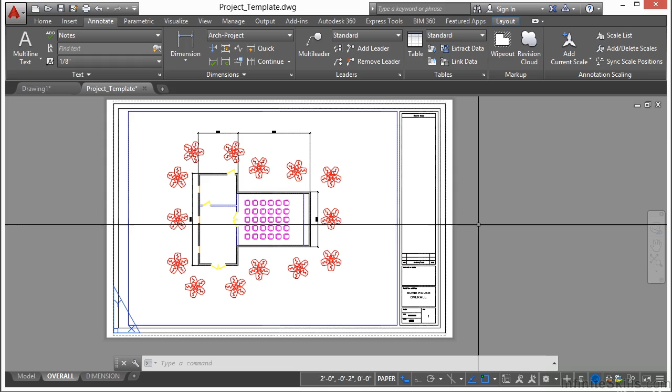So we've created our model, we've put in our accessories and plants, and we've created our first drawing. Now let's create our second and last drawing.

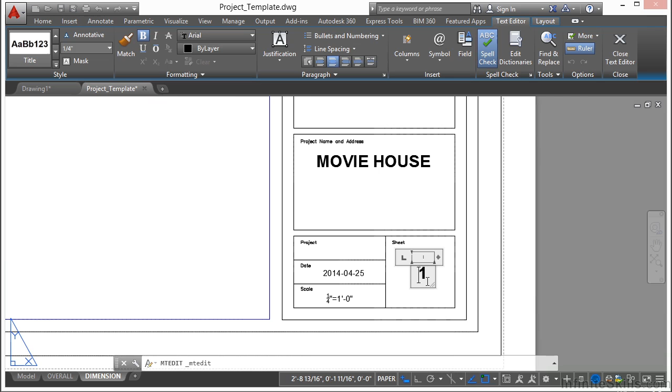The Paper Space tab is already here for us, and we're going to draw in some dimensions. There are a few things I don't want to show in this drawing, but before we start, I'm going to change this, double-click the text, delete the number 1, and make this sheet number 2.

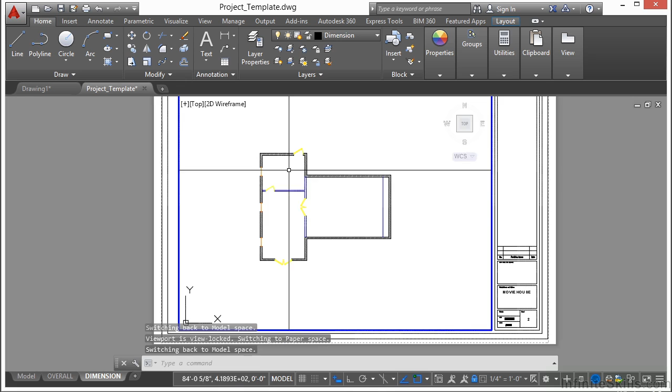Activate this viewport by double-clicking inside it. Go to the Home tab, Layers panel, click on the snowflake - it's the freeze - and let's freeze the plants, freeze the footing layer, and freeze these chairs. I just want to dimension the location of the doors, windows, and walls. Double-click outside of that viewport to turn it off.

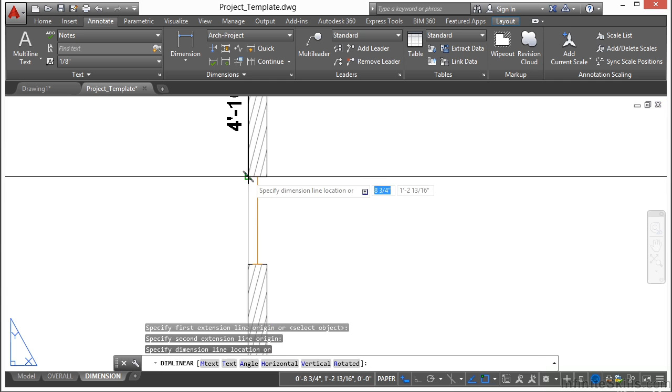Now we're on the dimension layer still, so that's fantastic. Go to Annotate and the dimension command - we're going to create a few dimensions here. Let's start on this outside wall. Select there and dimension to our window, 4 feet 10 inches.

Now we're going to continue, and it picks up where we left off. Click that point, we're going to go all the way down the wall, zooming out, panning a little, and then zooming in. When I'm finished, I press Enter, then press Enter again to fully cancel out. So now we've located all of the doors and windows for that side of the wall.

Let's put in an overall dimension. Start the dimension command again, click on that same point, click on this endpoint, and put that dimension in there.

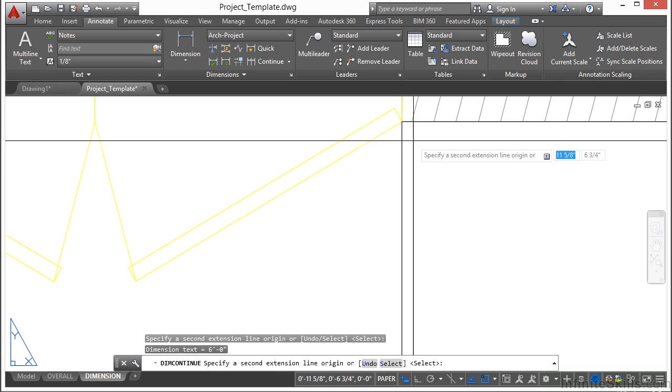Let's do something similar here on the bottom. Start the dimension command again, dimension to the door, and then continue. There's that one. Now let's do the top.

Dimension to that point, the first part of the door. Pull your dimension up here and continue.

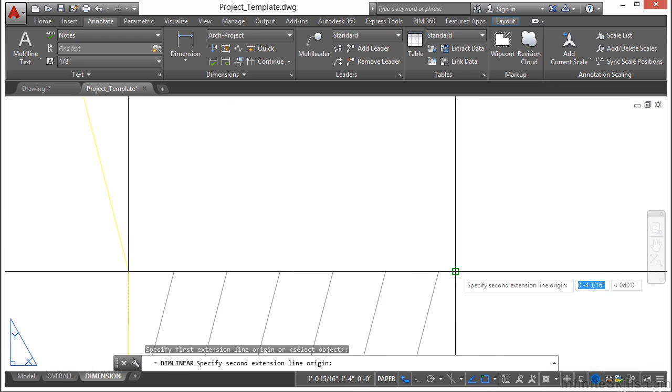Now you can see here, we're repeating a lot of the same steps over and over again. That's okay. Start the dimension command, click here - we want an overall dimension of this section. Bring that up and let's continue on, and let's locate the end of that wall.

Now I want to put an overall dimension for the entire length here of the building. Start the dimension command, click on this endpoint here, and then zoom in down to there, and click on the endpoint here.

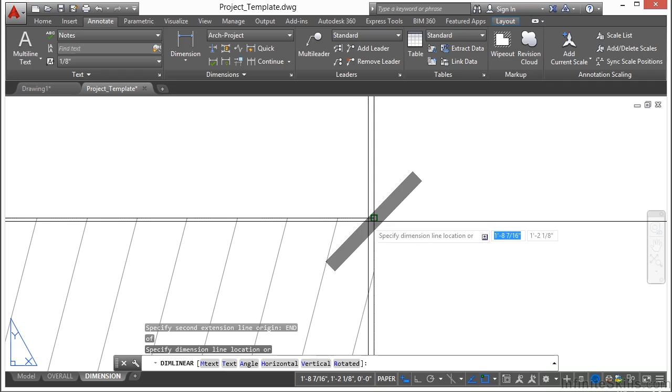If you have any trouble with your O-snaps getting to the right snap location, don't forget you can manually type them in. Put that dimension right there. Perfect.

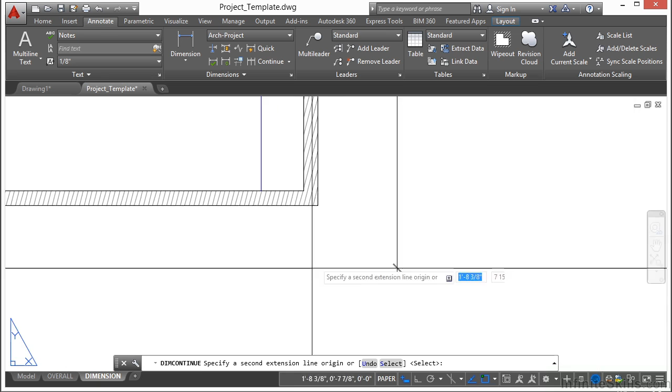Let's put in this dimension here now. Dimension to that endpoint, dimension to this endpoint. We're going to stretch it out to the right, continue down, and snap to there. Fantastic - so that's all of our external line work that we have dimensioned out.

Now we need to do some of the internal, and we're nearly complete. Start the dimension command again, pick that endpoint, and just pick up here, parallel's fine, locates that wall for us. Let's locate this wall here, enter into these endpoints. Now we know where that is.

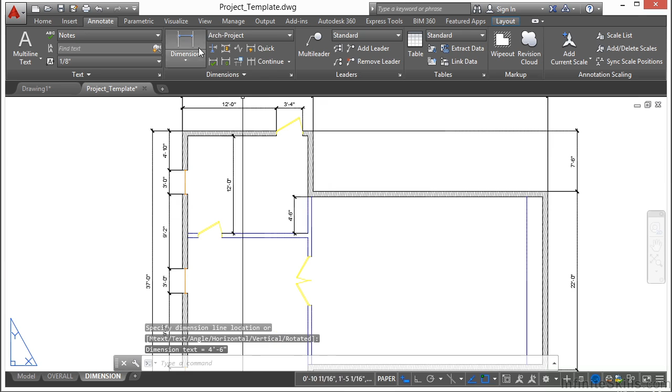And we need to know where this door is here as well. So we're going to start from this point, click to that point, stretch out our dimension, continue on, and dimension the doorway.

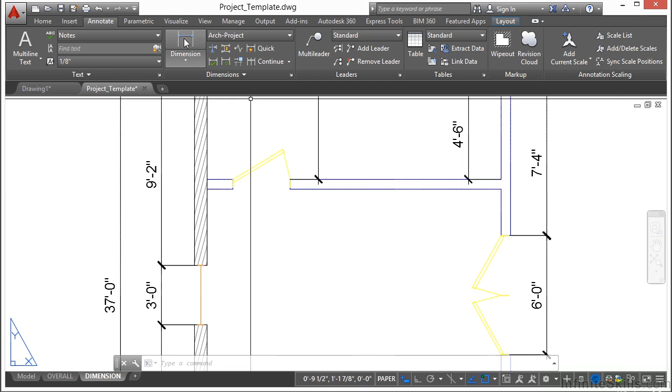Now we need to locate this last door. Start the dimension command, dimension this section here, and then continue on, dimension there, and enter. Enter again to finish. Now I see here that this dimension is kind of in the way, so we're going to stretch it down that way and stack it. Now we can see it.

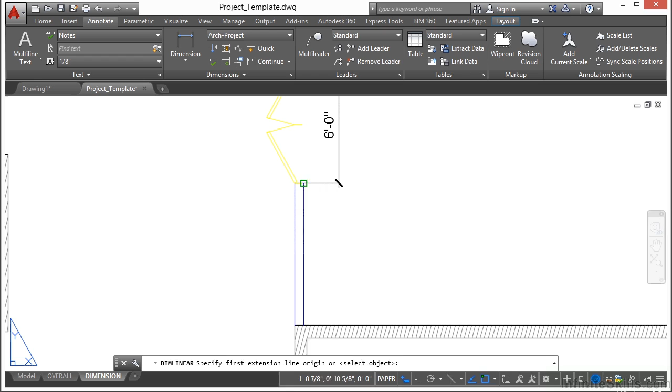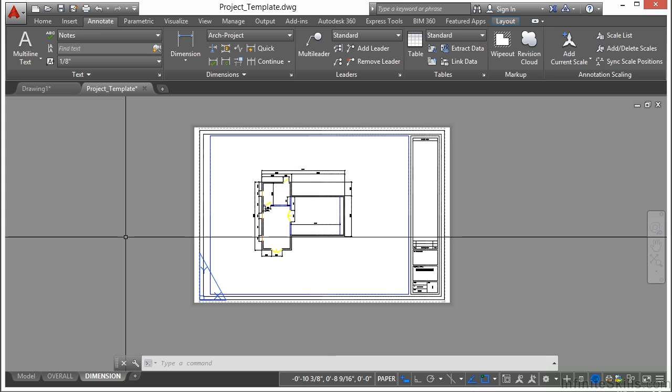We now have our fully dimensioned model. This gives us all the information that we need to draw these walls, locate the windows, and the doors. Now we have a full set of drawings - a nice overall site plan and a fully dimensioned set of drawings as well. Both have been title blocked, labeled, and have a drawing number in them. And that is essentially how you make a drawing in AutoCAD.